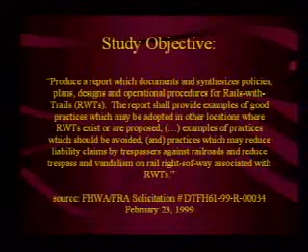Part of our mission—we were hired as a consultant team. We had railroad experts on our team, trail folks on our team, a whole consortium of folks involved, and an active committee of railroad folks, trail folks, and everybody in between. Our mission was to develop a balanced approach that clearly represented all the interests. So this is not an advocacy report that promotes trails on active railway lines, nor does it discourage them. It's instead laying out all the issues and lessons we've learned throughout the history of developing Rails with Trails today.

The process involved reviewing existing literature, an in-depth analysis of 18 existing Rails with Trails—there are over 70 in the country today, but we specifically analyzed 18. We did interviews with all the major railroad companies in the country, as well as many minor ones. I went to a whole lot of railroad conferences and talked to folks there.

We had draft reports that were reviewed, and I had a stack of comments this high at the end—it was amazing. A lot of research went into design practices. We had a specific legal symposium with all the Class 1 railroad lawyers and many transit agency lawyers in the country together to talk about the legal issues. And we did a lot of really specific outreach to railroad folks and trail folks around the country.

The final report was due July 1st, 2002. We missed the deadline—no wait, we didn't miss the deadline. The federal government missed the deadline.

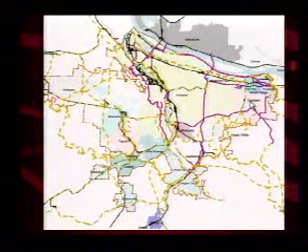Then up in Vancouver, there's a mainline Amtrak line where there's interest in having a railway trail. There's probably more in this region that I'm not aware of. There's some out in Gresham, too, with interest in having a trail next to part of the MAX line for access. So there's a number of potential railroad trail projects in this area.

But all over the country, we're seeing a lot of interest in Rails with Trails. Now, from the railroad perspective, the railroads were here first. When they came, they picked the very best land, the flat land, the scenic land, and the cities grew around them. The railroads literally bisect cities all over the country today.

Railroad corridors are typically not fenced through communities, and they often bisect neighborhoods. We often have a love-hate relationship in communities with railroads. We have a nostalgic view of railroads from the Mark Twain era, of people walking on the tracks. And then we also hate railroads because they're kind of industrial looking, and they're loud when they toot their horns

as they come through neighborhoods, and there's environmental issues, and particularly the Class 1 railroad companies are not particularly tuned into the community. They tend to be located somewhere like Iowa, their headquarters, and they're not really part of the community. Now, there's a lot of short line railroads and transit agencies that are much more tuned into the community, so there's a real mixture of things going on.

And despite the fact that the railroads really have made an effort in many places in terms of safety, in terms of keeping people off the tracks and keeping people out of harm's way when it comes to moving trains, people are all over the tracks.

Trespassing is a huge issue with railroads, and if you are on the tracks, you are trespassing. The law is extremely clear on this point. But it's very hard for the police or for the railroads, who have their own security systems, to police every single mile of railroad all the time.

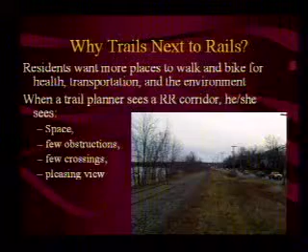And then the other reason is that when trail planners look at their options in communities for making them pedestrian and bicycle friendly, their options are usually something like a high-speed roadway, where maybe they could put bike lanes on the road, but it still isn't going to be nearly as pleasant as having a separated trail.

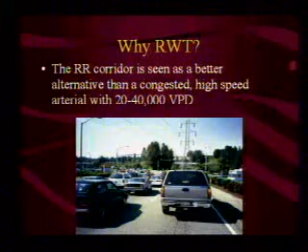So that's a lot of what communities are looking at. In addition, there are about 65 to 70 existing rails with trails in this country, and most of these appear to be operating with little or no problem. The Rails to Trails Conservancy put out reports in the 90s documenting interviews with trail managers for a lot of these corridors, and they all said there was no problem. The railroads absolutely hate this report—they think it's completely biased and inaccurate. But the existing rails with trails do appear to operate with very few problems.

Now, from the railroad perspective, this is privately owned land in most cases. It's their place of work, they're trying to do business, and they have very little interest in having what they perceive as recreational activities next to their place of business, which in their mind increases their costs and increases their liability.

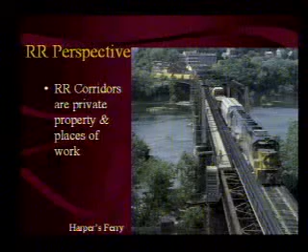This is Harper's Ferry. This trail on the left side, if you're looking at it, was a track that was converted. It's kind of an interesting bridge case.

From the railroad perspective, trains are involved in injuring a lot of people every year, and it costs them a lot of money. So it's really about business—it's about business, it's about money, it's about safety, and all those things come into play. When we interviewed all the railroads, we found that their initial, knee-jerk opinion is usually that you shouldn't allow recreational uses next to a railroad corridor.

Some of the things we looked at: when you're in a master planning process, we recommend that trail planners look at all reasonable alternatives, not just knee-jerk put the railroad corridor on the plan without having looked at whether it's remotely within the possibility. That's what railroads have found for years—the trail planner comes to them after it's already on an adopted master plan, after they've gotten funding and done preliminary design work, and then they come to the railroad saying, we've got this trail plan we want you to bless, we just need an easement from you. The railroads don't take kindly to that. They'd rather be involved up front, and they'd rather have the trail analysis really look at alternatives.

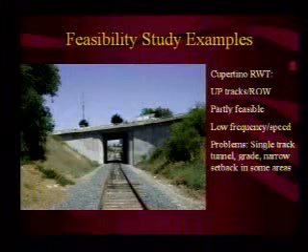And there are parts of it that look like this, where the trail would have to go through a single-track tunnel, or obviously go around it. Parts of this are really not feasible, and we'll have to divert to other surface streets, or wait until such time as the city can either buy the right-of-way or the train operation discontinues. But it is a low-frequency, low-speed train operation, so there are not as many safety issues as when you're in a high-speed corridor.

Another example is in Maryland, Indian Head. This is considered feasible from a technical standpoint. It's flat, there's lots of space, very low frequency. The only issue here is environmental issues related to the wetlands that are part of this, and that's important in every trail, to look at for the most environmentally sensitive planning. There are some parts of this that would potentially be on boardwalks or have to divert to some other place.

And then there was another one that we did, I don't think I have a picture of it. That's on a Union Pacific rail line going from Davis, California, to Dixon. We found that it's just not feasible. The railroad had plans to have double and triple tracks on the corridor, and there was just not going to be any available space. There was a good alternative corridor though.

So as part of the process, we recommend involving railroads throughout. Some of the things we heard were that trail planners often look at a corridor today as a snapshot and say, well, there's lots of space, so you should be able to put a trail here. But railroads are looking at things for 50 years. They're planning to double and triple track, they've got plans to expand their business, they're planning on selling that land for a variety of reasons. They have plans, this is their corridor, and it's really important to recognize that what we see now isn't necessarily what the railroad has planned for the future, and to work with the railroad on that.

The other thing we learned specifically from the national railroad companies, called Class 1 railroads, is that they're a very formal operation, and you really have to be in it for the long haul if you want to do your corridor. You start now, and you're looking at 10 years before maybe you could have something built. It's a very formal structure in these companies.

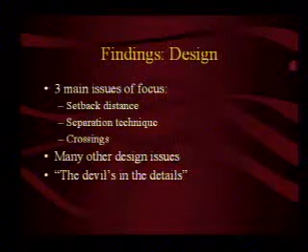And what I find is that the devil's in the details. When you get right down to designing a trail, you've got this very specific situation, and the little diagram doesn't exactly apply to this situation, then you get into a lot of issues. And each one of those takes time to work through.

Let's talk about the setback. Talk about our recommendations. We recommended on setback - we really went through a very lengthy process with the railroads related to setback.

There was at various times an attempt to have very specific setback recommendations: if the train goes at this speed and it's this frequent, then the setback should be 25 feet; if it goes at this speed, it can be 10 feet, or maybe 50 feet. We had very specific numbers in there. In the end, where we ended up was that every case is different, and every case has to be analyzed in and of itself, so we don't have specific recommendations for the actual number.

We have a lot of examples, and we have a range. 8.5 feet is the absolute bare minimum, because that's the Public Utilities Commission's requirement for fixed objects to be that far away from the center line of the track. That's the bare minimum, and I think we have that on the Springwater OMSI. But in most cases, the railroads want to get 25 feet or more. On the Coastal Rail Trail in Southern California, they want 50 feet back from the track.

Providing fencing and separation is kind of a mixed thing. Fencing is good because it channelizes people, keeps them off the railroad for the most part. But people can break through fences, climb over fences, and vandalize fences. It's very expensive to maintain fences, and it's not a guarantee. There are other separation techniques that may be better: vertical separation, drainage swales are a good way to keep people out, walls, and vegetative buffers that tend to do just as good a job as fences do.

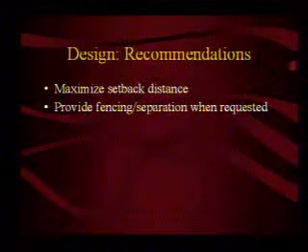In most cases, the railroads want fencing, and the trail agency doesn't want to pay for it. So it's kind of an issue that comes out of that. But if it's on railroad property, you really don't have much choice — if the railroad wants a fence and it's on railroad property, you have to put in the fence. If it's on government property and the railroad's leasing it, then there's more wiggle room.

At-grade crossings are a huge issue. The Federal Railroad Administration has been very aggressive at closing at-grade crossings in this country. They're trying to close them for safety reasons — they close motor vehicle crossings, they close pedestrian crossings, they work hard to close crossings in communities. They're very proud of themselves. The railroads themselves go around to railroad conferences and give presentations on how they close this many every year.

In the meantime, the trail folks come around and want to add an at-grade crossing. The railroads don't like that at all, and the Federal Railroad Administration doesn't like it either. So a good practice is to minimize at-grade railroad crossings, use existing at-grade crossings, develop over or under crossings, or try to close other crossings as a trade-off for the new one that goes in. So railroad crossings are a big issue.

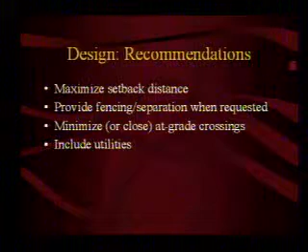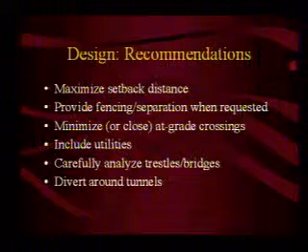Including utilities in the corridor — there's a lot of issues related to utilities, and I'm not going to talk about that too much. Trestles and bridges are another big issue if you have to go over a railroad bridge or a trestle, so you have to carefully analyze those. And going through single-track tunnels is pretty much a no-no — don't go through a single-track tunnel if you can. There's almost no way you're going to get your trail built if you have to go through a single-track tunnel. And then there are environmental impacts.

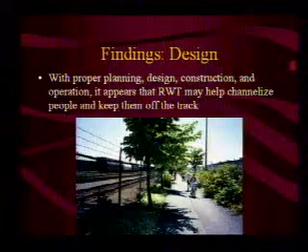Okay, so now I just want to buzz through some examples here. We found that with proper planning, well-designed trails do tend to keep people off the tracks. They tend to be a good way to reduce trespassing and move people away from the tracks. A corridor like this is a good example.

Over half of the existing rails-with-trails are on basically mainline trains right now — some mainline, some passenger. The rest are on transit or short line. There's a huge variance in train speed: there are very low-speed trains, 5 miles an hour, 8 miles an hour, and in Europe mostly, and Australia, there are very high-speed trains. The Coastal Rail Trail and the Northeast Corridor in New England will soon have over 120-mile-an-hour trains with a trail next to it. There are a couple of other examples of high-speed rail in this country, but the trails tend to be quite far away from the tracks. There's quite a lot of diversity in where the trails are located — some industrial, some rural, some urban — and a lot of different types of trains.

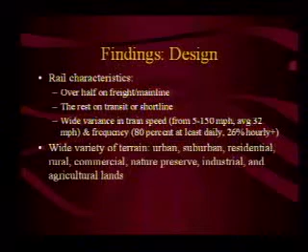The average setback is about 33 feet, but there's a considerable range as well.

I don't think I have time for all this. The trail setback should be correlated to the speed of the train, the frequency of the train, the site conditions, the type of train, sight distance, and in almost every case there has to be engineering analysis and judgment involved in that.

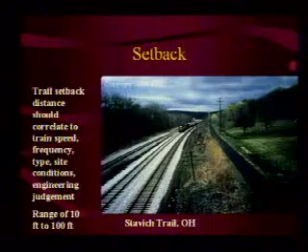This one is very close to 10 feet from the edge of the track, from the center line of the track to the edge of the trail. And it's working quite nicely, and it's gotten trespassers off the tracks.

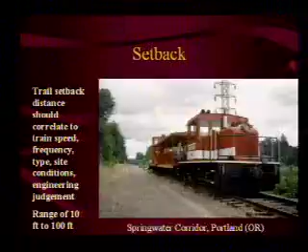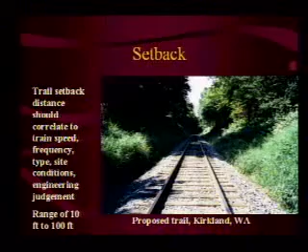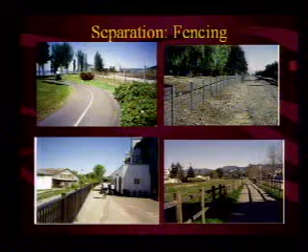There's all different kinds of fencing, and the railroads typically do want to see fencing. There's wrought iron fencing down in the corner. There's your wood rail fencing, which doesn't really provide much of a deterrent, but it's sort of a channelization thing. Then there's your typical chain link fence.

Okay, so that's separation. Let me talk about crossings. It's the area of greatest concern, as I said. This is what I heard over and over and over again throughout the process.

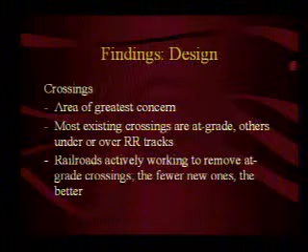That section of the report was the most pored over, the most attacked, the most vilified, and in the end is probably the strongest because so many people were involved in ensuring that there are safe and well-designed crossings as part of trail projects.

A lot of existing trails have very simple railroad crossings like this. People cross the tracks, they have a crossing, there's warning signs, and that's it. There's nothing really too aggressive about it, and they have been working pretty well.

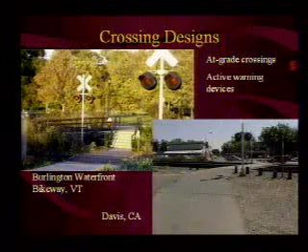There are some that have more active warning devices - there are gates, there are lights - and we talk about that in the report as when you would want to bump up to the next threshold.

Then there's above-grade crossings, which there's a number of good examples of out there. They can obviously be extremely expensive to build. You have to meet ADA, so you have to get above the tracks. You have to have a very high clearance of the railroad, of trains, which can be very, very high.

And the question of whether people will use them - they have to be well designed and obviously very well integrated into the trail system or people won't use them.

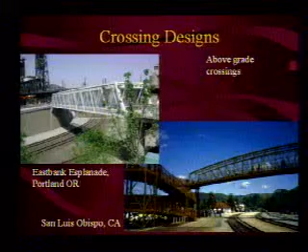Then there are a number of good undercrossings, and like every proposed tunnel or undercrossing, you've got safety concerns, you've got concerns about whether people will use them, whether they're going to be dark and scary places, or whether they're going to be well designed.

There's a few really good examples that are well designed. This one down on the lower right is in Vancouver, Washington, as part of the Discovery Loop. So you can see, it's a really nice undercrossing of a railroad track.

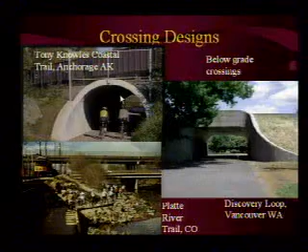The Platte River Trail in Colorado and the Tony Knowles Coastal Trail in Anchorage, which is a really impressive trail system up there. Then we talk a lot about bridges and how to design bridges.

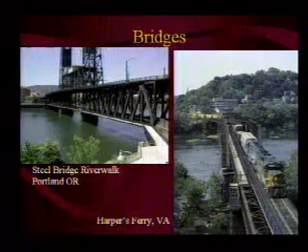There are a couple of examples of cantilevering something onto a bridge or taking a single track and turning it into a part of a trail component. But in general, the railroads are mostly opposed to having anything hung off the side of their bridges or turned into a trail bridge. But there are examples out there of creative ways.

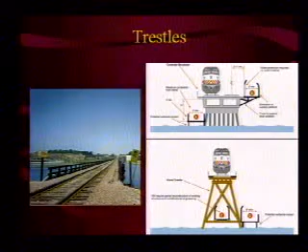But here's one example on the left where if you encounter this in your project, it might be a fatal flaw, or you might have to build a new bridge. Okay, I'm going to go through this.

Okay, a little bit on operations and maintenance. I'm just going to skip that.

On the operations and maintenance side, I'll just quickly say that when I went to a lot of railroad conferences, what I frequently found is that train engineers are involved, particularly in Operation Lifesaver. They have this very aggressive education program they developed themselves, called Stop, Look, and Listen. It's all about going to schools and trying to get kids not to cross or walk on the tracks. It's funded through the railroad industry and is primarily run through volunteer time of railroad personnel.

What happens is that the people who operate the trains, typically in their careers, have killed someone. They would come up to me at a conference and say, I can't believe you would want to put trail users in my corridor. I see people all the time on our tracks, and I killed one, or I almost killed one. It's an incredibly scarring experience for a train operator — they are completely out of control and cannot stop the train in most cases to avoid killing that person. A lot of times it's suicides, but they personally are scarred for life by it. I think a really successful railroad trail project reaches out to those individuals and talks to them about what they're seeing on the corridor.

I went on a project in Northern California, in the San Francisco Bay Area, that goes along a curve. We were a consulting team, and we talked to the Parks Department, who said, oh, this is a great project, we're very excited about it. Then we went to talk to the railroad, and they said this is the absolute stupidest place in the country to put a trail — the most dangerous possible place because there are sight distance issues and a lot of fog when people come around the curves. So we went out with the train operator to see where the blind curves were, where the fog rolls in, what the issues are, and where they're seeing people. That made a really big difference in the project.

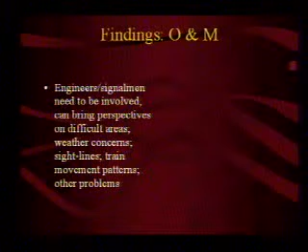It's about working with the individuals that are involved, not just the lawyers at corporate headquarters, but really getting involved with the operation and signal personnel on a project. Going out with those people and sitting in the cab to really see what they see at the front of the train is really important. They notice all kinds of things that others don't see — it's kind of cool to go sit in the cab and see what they see.

The vast majority of railroad trail projects are maintained by the trail authorities, who assume that responsibility. On the Seattle Waterfront Trail, this is a very low-speed train operation, and the signalmen actually walk in front of the train and kind of shoo people off the tracks — that's one extreme of these projects.

Then there's a railroad trail in Michigan where the corridor is now maintained by a volunteer group that raises money and does maintenance every year. It's actually a snowmobile trail in the winter — it doesn't look like much of a trail in the summer, but they get registration fees from snowmobiles and use that money to patrol it. They pay the police to come out, and the problems they see — well, first the tracks are covered in snow, so that's hard, but it's not always their fault since the snowmobilers tend to be drunk. That's the main problem: the police logs showed 25 citations, 23 of them for drunkenness, and the other 2 for not having a license. So it's different issues in different parts of the country.

What we feel is important — and the City of Portland did a great job on this on the East Bank Esplanade and the Springwater OMSI — is developing a public safety plan, a trail safety plan. Every trail project has this concern: residents are worried about safety, about people in their backyards, about the kind of activity and people coming into their area. For all trail projects, and a railroad trail project is no exception, I think a public safety plan that looks at all the issues along the trail is a really important component.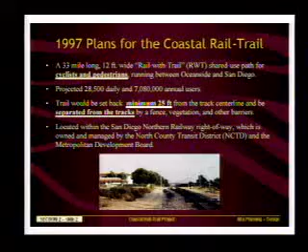Let me go forward—that's part of what it looked like. The North County Transit District operates 18 Coasters, 22 Pacific Surfliners, 48 trolley trains, and 5 freight trains weekly.

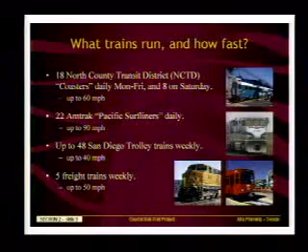There are varying speeds. We looked at the issue of setback, which was their main concern, and said we need to look at all these issues: type, speed, and frequency of the trains, what technique will be used to separate the tracks, topography, sight distance, historic problems, maintenance requirements, corridor ownership, and liability assignment.

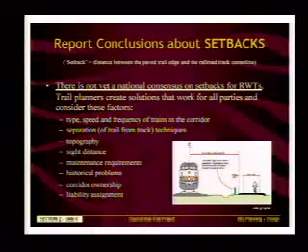The railroad was very concerned about wind debris and the velocity of the train, and how that would affect people in close proximity to the train. That was an important issue they wanted us to look at, so we examined that as well.

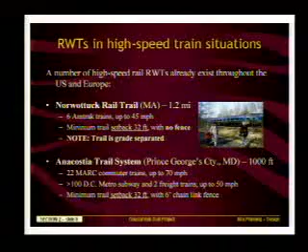Some examples of relatively high-speed rail in the country: the Norwottuck Rail Trail at 45 miles an hour, the Anacostia River Trail at about 70 miles an hour, La Crosse River State Trail in Wisconsin at 80 miles an hour, and the ATSF trail in Irvine which goes 90 miles an hour, though the trail is pretty well separated—you don't even know it's there a lot of times.

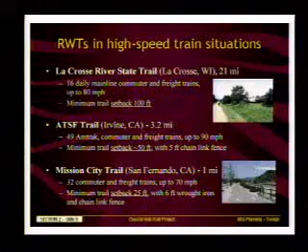There are a number of trails next to active railway lines in Switzerland and other places. It's interesting—when you call to find data, they just say, why would we have data on this, there's no problem, or why would we have standards for this? They just do it. They don't understand why there's a concern about putting a trail next to a freight train—it's no problem to them. I think it really comes down to legal issues. They just don't sue the railroad company if they get injured. It's just different there.

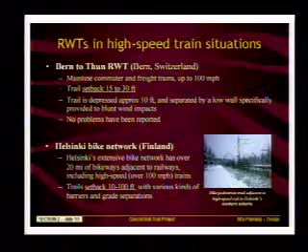Finland has a very extensive network of rail trails next to very high-speed rails. In the Northeast Corridor in Newark, a trail is planned—I don't know if it will be complete this summer—but it will be separated about 30 feet behind a chain link fence, next to 120-mile-an-hour trains. So that's a good precedent out there.

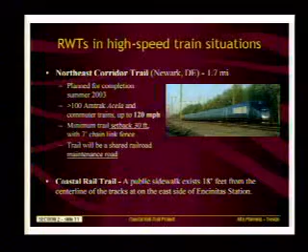Along the Coastal Rail Trail in Southern California, there are stations where the train runs right through, and there are public sidewalks only 18 feet away from the trains. There are lots of examples of high-speed rail where every passenger station along a transit corridor has relatively high-speed trains blasting through.

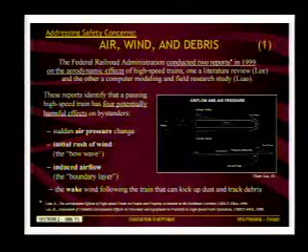It turns out the Federal Railroad Administration has two very technical documents analyzing the aerodynamic impacts of wind on passengers at passenger stations. They worked with folks in England where high-speed rail blasts through stations, and looked at the Northeast Corridor on the East Coast, studying air pressure changes—the initial rush of wind as it comes by you, and then the induced airflow.

And they found that basically there wasn't really much of an impact on passengers, enough of a safety concern. People weren't getting blown off the tracks.

But at the same time, at the Coastal Rail Trail in Southern California, the railroads did their own little study. They took a mannequin that weighed about 20 pounds—a blow-up mannequin—put some sand in the bottom of it, a scarf on her, a hat on her, and placed her about 10 feet, then 15 feet, then 25 feet from the tracks. They videotaped what happened when the train blew through the corridor.

They made a little video clip of this and showed it to the board of the transit district, over and over, saying look at this shot—the scarf is down the tracks, the mannequin blew right over, and the hat—this kid would have gotten it. They said this was representative of your 7-year-old daughter, who's not going to weigh 30 pounds.

It was a very emotional piece, and it resulted in the media down there going on a feeding frenzy about how ridiculous this was. They called it like the nuclear test site videos from the 50s—the mushroom cloud, the people in their little shack—it was really scary. That's how they felt watching this video: oh my God, it's so scary, my 7-year-old daughter's going to get killed.

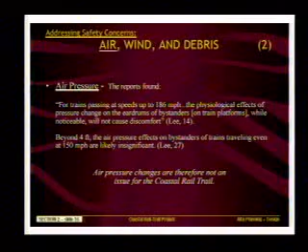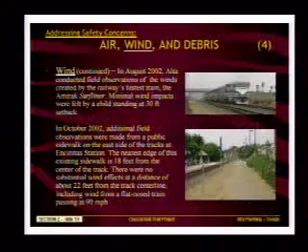We looked at these studies and called the authors, described our train situation, went through it with them, and that's what we found out. So we did a bunch of observations and recommended the 30 feet.

So what happened was the transit district staff, who had their mannequin study, didn't like our report at all—that's an understatement, they really hated it. They went to their board and recommended a 50-foot setback through the corridor, basically saying they just had to have 50 feet, with no scientific reason—they just had to have it. The board rejected their recommendation and said, look, there's scientific analysis that says 30 feet is adequate.

So they're at this point trying to design the trail with a 30-foot setback, which it'll be fine. So that's that story, and that's really all I had to say about that.

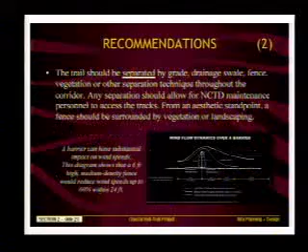Every one of these projects is very interesting. They're all a little bit different, and this is what it would look like on the Coastal Rail Trail. It would be about 30 feet in this area, allowing for a parallel railroad maintenance roadway. In some areas, it would be 70 feet away, so no problem.

Go ahead. When you say 30 and 70 feet, you're talking from the center line of the nearest track to the edge of the paved trail. So in that space, you could have a wall or a fence or something else. You could, in many cases, get fairly close if you had a good separation technique. But again, it depends on all these factors, and I think it needs to be analyzed very carefully.

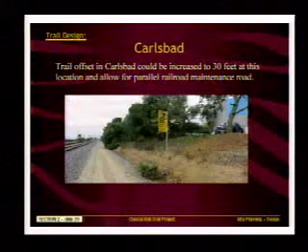I didn't learn that. I have a number of contacts in England, and I didn't get information from them that led me to believe that. But I did find that to be the case in Switzerland and Finland and most of Scandinavia, that it was pretty common, but not in Germany. The Germans said no, the rail is so high speed, and it goes through all these really tight mountain channels that they don't tend to do it. Australia, too — and I should say most of the railroad agencies in these countries are quasi-governmental owned, so it's kind of a different environment. But Perth, Australia was the best example.

The railroad agency is working with the transportation agency, and together they're actively putting a trail on every single railroad line, and they have very specific design guidelines for that, and they're aggressively doing it. So I kind of saw that's what they have decided to do. So there are some good examples.

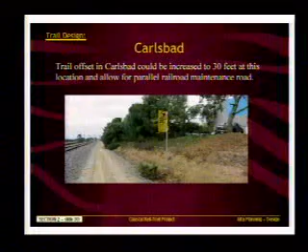And I found the other really interesting one is the Canadian Pacific Railway. And they come at it from a very different perspective, with a different liability situation up in Canada. The person I was dealing with there was a security officer, the chief of their security. And what they found is that if they look at security problems, putting trails there on purpose gets rid of a lot of the problems they were having: trespassing, vandalism, and dumping.

In the crime prevention world, there's a theory called crime prevention through environmental design. The principle is like the broken window building theory, the Rudy Giuliani theory, that if you clean up the little things, it helps clean up the big things. So the idea is that if you design a corridor that was previously scary and yucky, where people were doing bad things, and you clean it up and get good people on the corridor, families and eyes on the corridor, those problems tend to go away. So the Canadian Pacific Railway is actively looking for spots where they can clean up problems by putting in trails. They kind of have a reverse impact compared to here.

And Jennifer's whispering.

Okay, so I just want to say that I think the Banfield Corridor project I'm trying to do has political difficulties, not technical ones — technically it's no problem. You should see my slideshow, it's great. I want to see your slideshow. So on that note...

If you mentioned that politically or technically, you've got to deal with your issues of space or separation, and then in the planning process, it's bad to bring the railroads in at the last minute just to stamp it. So can you explain what are the successful ways of getting a project started and getting it through the phase? What are some stories of how the planning process was initiated?